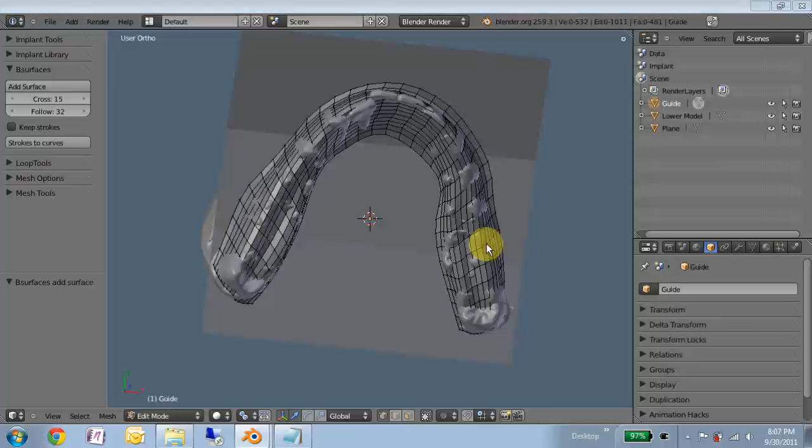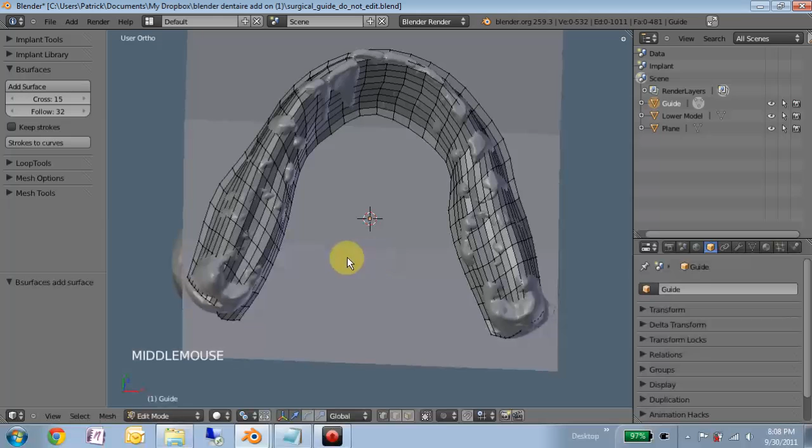Okay, this is part 1A or 1B of making the surgical guide, which is this first part is essentially fabricating an occlusal splint which is stable in the mouth. So where we left off, we had just connected our grease pencil sketches using the B Surfaces add-on, and that leaves us with this kind of two-dimensional mesh, which roughly approximates the surface which we would like to seat on top of.

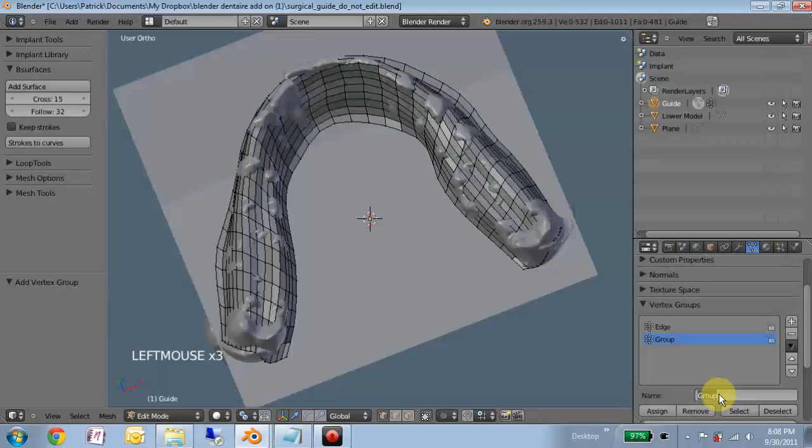So we'll take this time to organize some of our vertices. We'll call this bottom. So first, we'll select the non-manifold edges, which are just the outside edges, and we'll assign that. I don't know if we'll actually end up using this, but it's at least good to have them. While we're here, we might use the Loop Tools Relax. You can see that kind of rounds all these edges off.

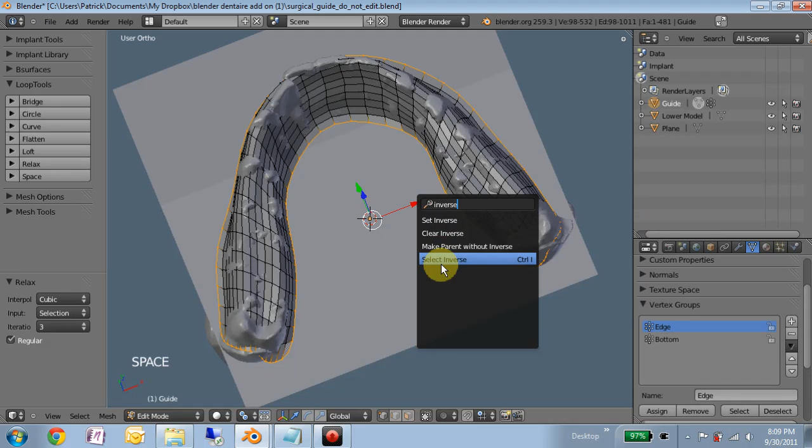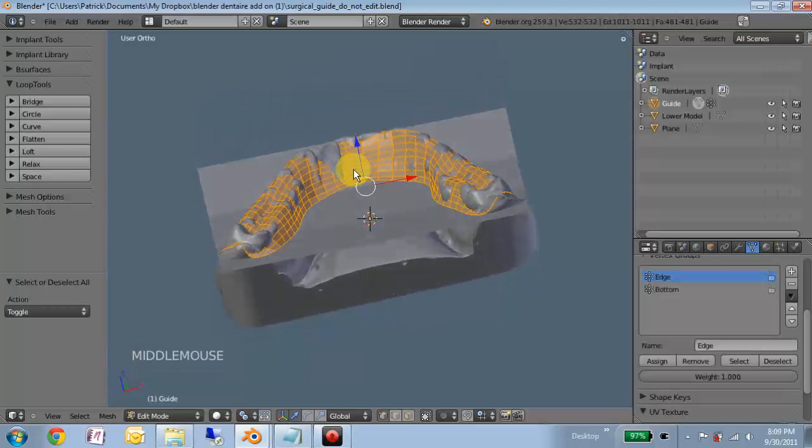Next, we'll select the inverse of that. And actually, we'll just go ahead and select all of them. And assign, oh, very important, we want this to be 1. Assign. Okay, so now we'll select everything. We will extrude it. Hit Z to limit Z direction, and we'll type in 3.5. Type in 3 or 4 or 5 to get an even thickness in the Z direction.

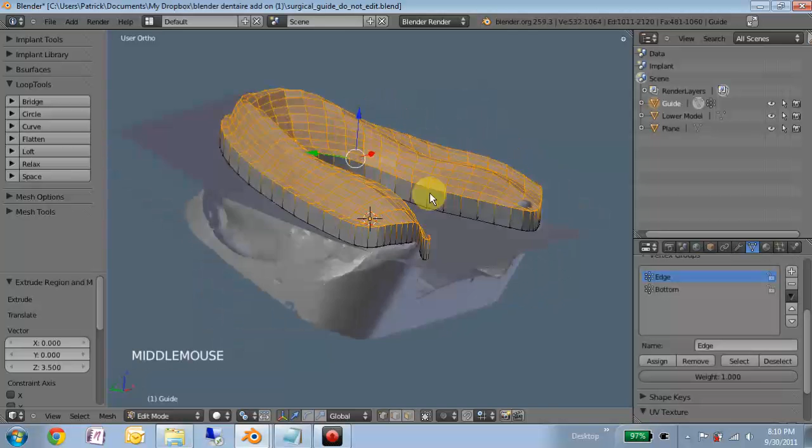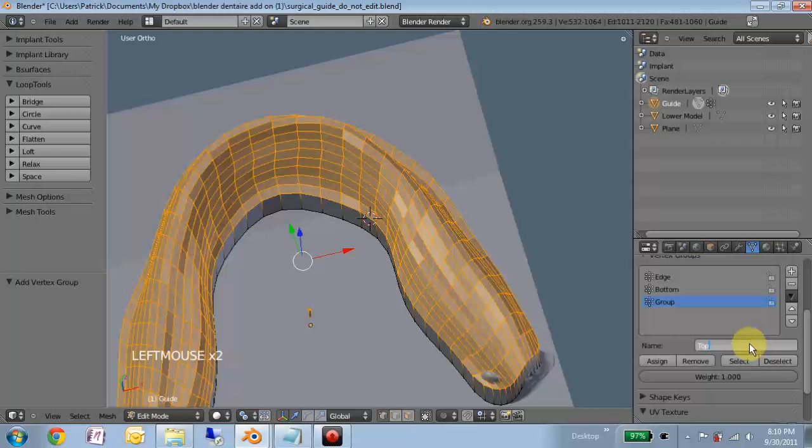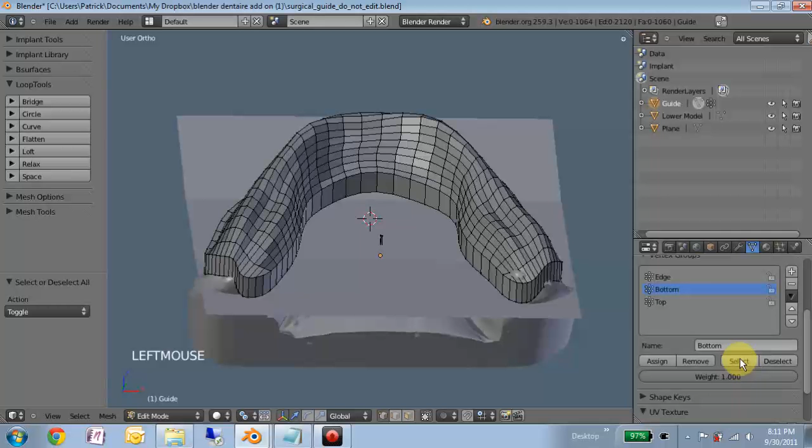So if we take a slice here, we'll see that that thickness is this way, not this way. But while we have these vertices selected, let's make a new group, call it top, and assign. Okay. So from that, let's select the bottom, and we're actually going to drag it up above the top. And the reason we're going to do that is because we're actually going to project it down onto the teeth. So really we just need to make sure that every vertex is above all of the teeth.

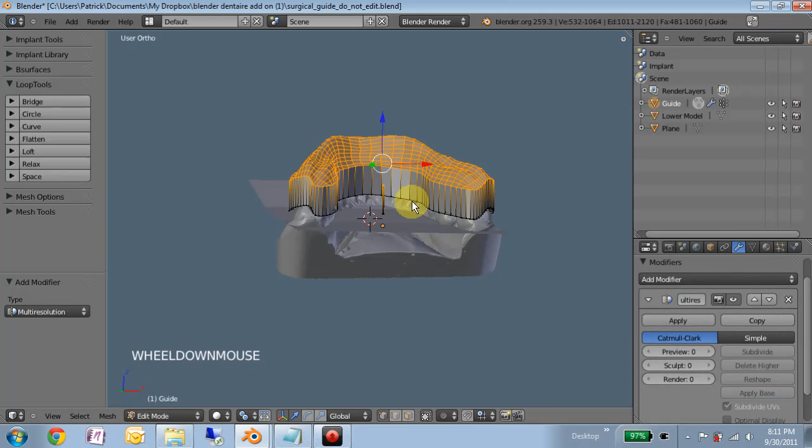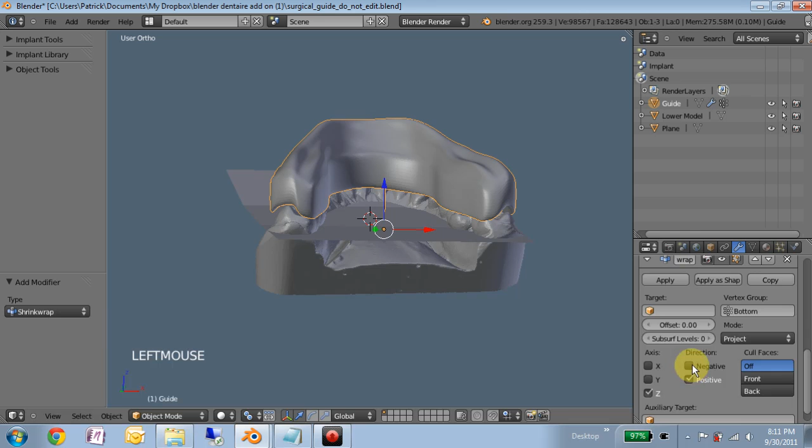So we'll come over here to modifiers, and let's add a multi-res. 1, 2, 3. Let's add a shrink wrap. This will be the bottom vertex group. Project Z just in the negative direction. And the first target will be the lower model. And the auxiliary target will be the plane. Give that a moment.

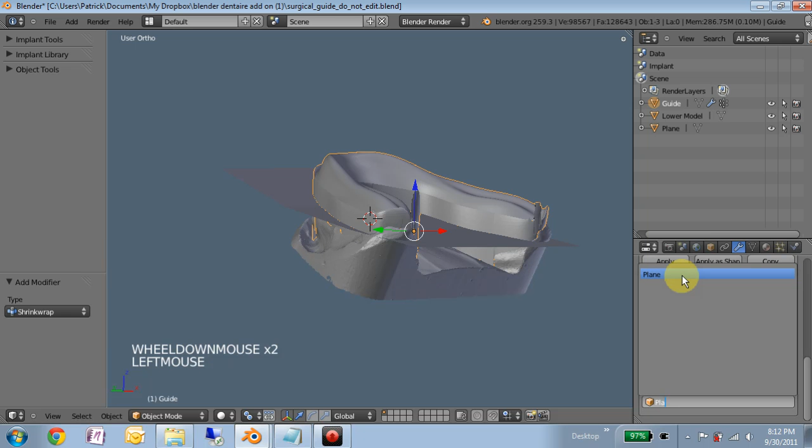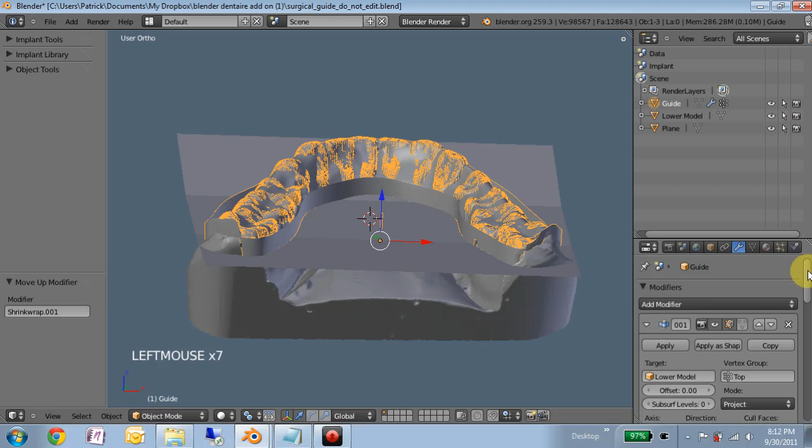What we will do, we're going to copy this modifier. We're going to change the vertex group to the top group. We're going to move it above the multi-res modifier. So if this is looking a little tricky here, we just moved this shrink wrap modifier up. We'll move it up again. What we're actually going to do is, the nearest surface point, we're going to give it a 3 millimeter offset.

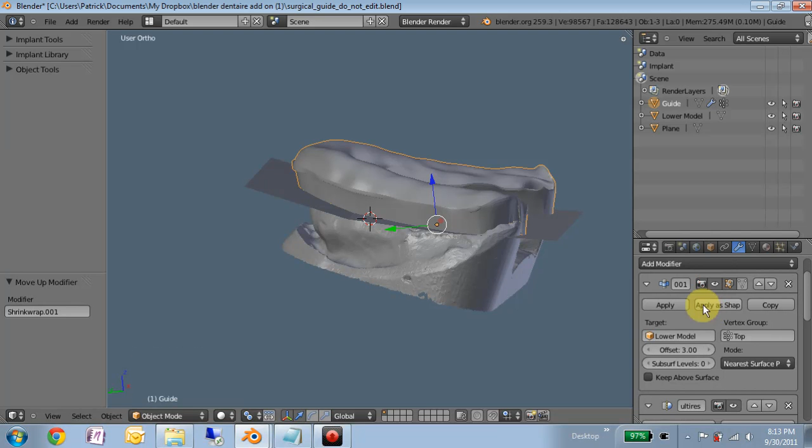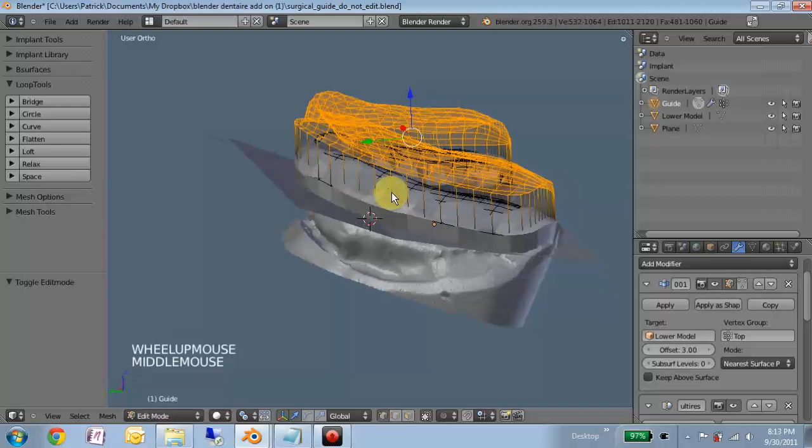Okay, so what we've done is, if we go into edit mode, we've actually moved the bottom up high and then subdivided it and then projected it down to the occlusion. The upper layer we've projected onto the occlusion but then stepped it off and then subdivided. So a little tricky, but if we come back into object mode and we hide the lower model, hide the plane, you can see we're left with a nice blocked out 2 to 3 millimeter thick appliance which will snap onto the dentition. You can obviously make this a little smaller. Maybe 2 millimeters might be a more appropriate thickness.

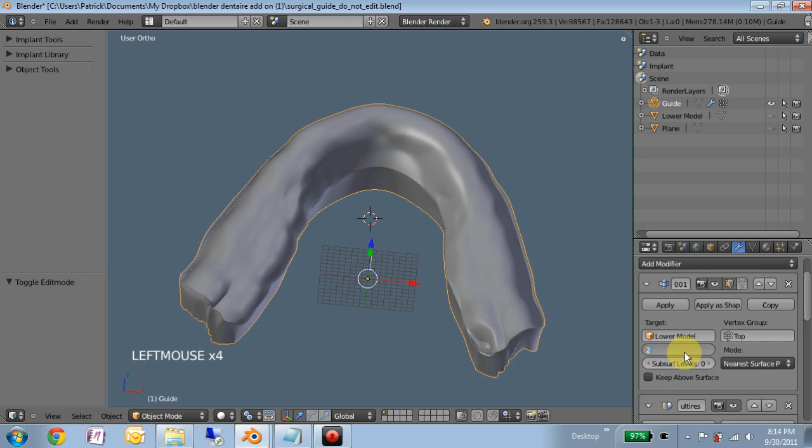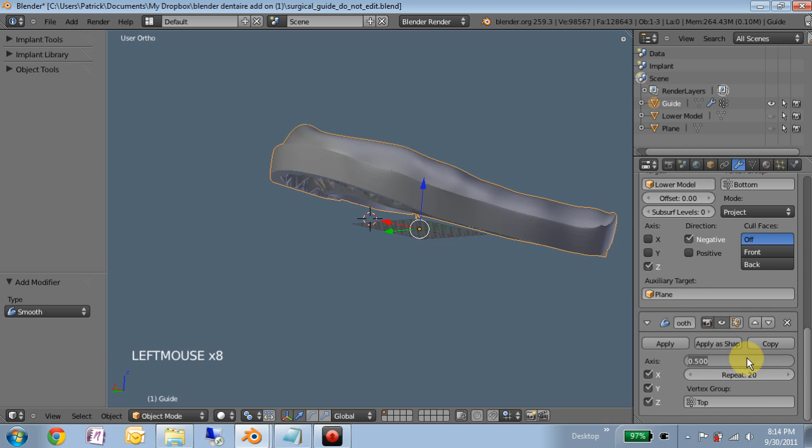And then to top it all off, we should add a smooth modifier. At the bottom here, probably 20 of these. But we don't want this to affect our occlusion, so we'll limit this to the top. And we'll make that one. So, here we have a rough occlusal appliance ready to seat and provide stability to our surgical guide.

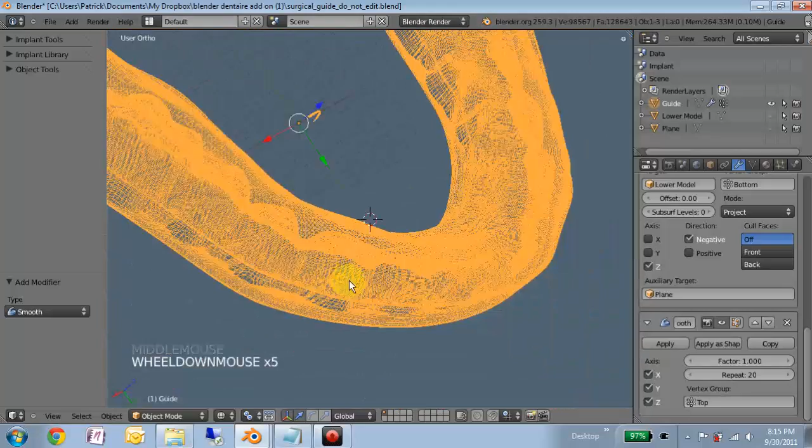If we hit Z to look at this, you could probably even get away with just 2 subdivisions. Yeah, that looks much more manageable. Okay, so I'm going to stop here.